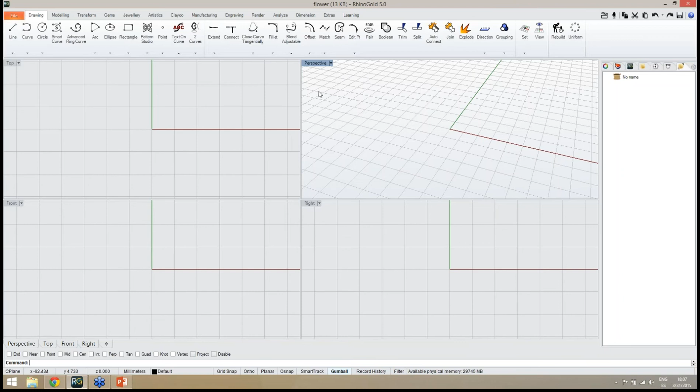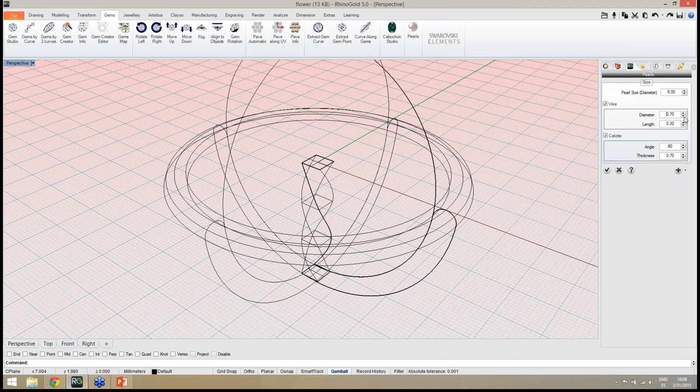So let's open the RhinoGold interface. As you can see, the first step I'm going to use, under the Gems tab, is the Pearl Studio. I click on the Pearl Studio icon, and I just need to define my pearl. In this side panel, I need to define the diameter - in this case, I'm going to use 8 millimeters diameter. Then we can define the wire and the calotte. I would change to wireframe display mode just to show you what is the wire - this is where we will place the pearl. So I can define the diameter, in this case 0.8 millimeters is good, and of course the length.

As you can see, I can define it bigger or smaller. In this case, I will define it in the middle of the calotte, but as you know, we can change it. In this case, it's just to make the Boolean operation easiest.

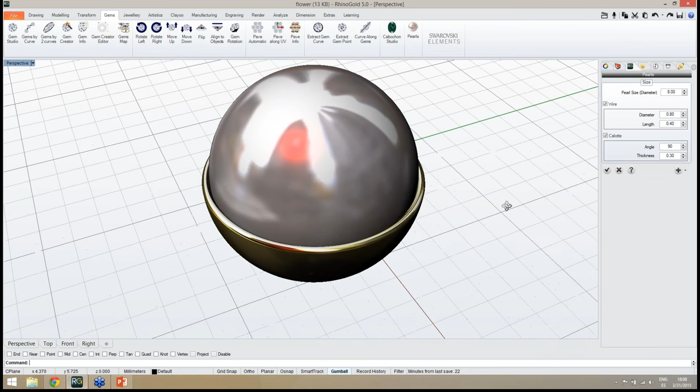After this, I'm going back to rendered display mode, and I just need to define the angle here. I will define 90 degrees, and of course the thickness. As you can see, we can change the thickness as well. In this case, I'm going to use 0.3 millimeters thickness, okay.

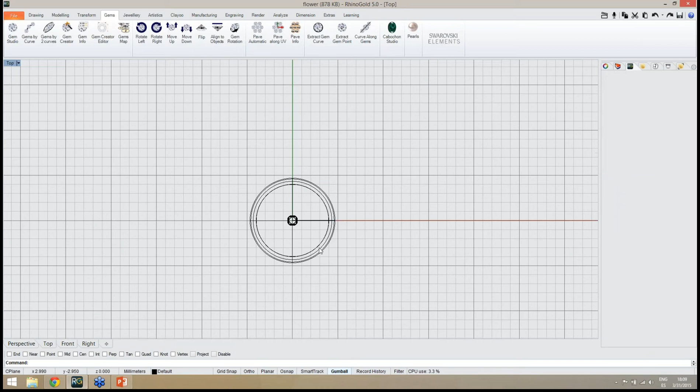Now we have the pearl added to the document. The next step is to define the flower. I'm going to the top view, and here I can change the display mode again.

In the top view, I'm going to define a curve. Let's go to the drawing tab, and here I'm going to use the Smart Curve tool. When I click on Smart Curve tool, I just need to define my points to define the curve. As you can see in the command line, we have several options.

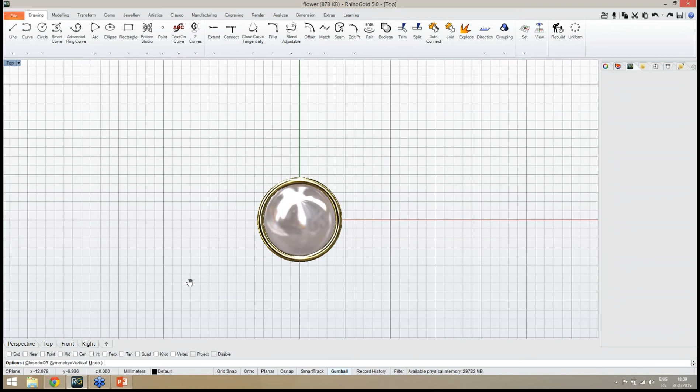So I'm going to start by activating the vertical symmetry. I just click on symmetry, then vertical, and as you can see, now it's activated. So now I just need to define the points. First point, I define both sides of the curve, and now easily I can define my curve.

In this case, I will leave more or less 3 centimeters for the diameter of the flower, so 1.5 centimeters is good. After the second point, I just press enter, and now I have my curve here in the top view.

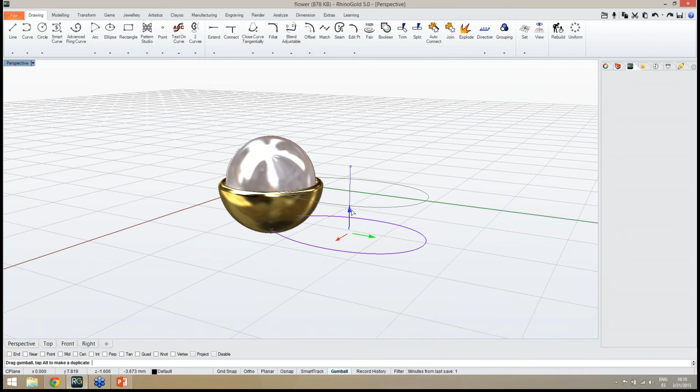Let's go back to the perspective view, and now I can organize my curve to be easier to define. I'm going to move down my curve more or less at the same height as the base of the pearl, so I can do it in the right view or front view, maybe it's easier. I believe this is a good position.

Back to the perspective view, what I can do to adjust my curve is to make these points inside of the pearl. I'm going to select the curve with a left click, and now I will use the edit point tool.

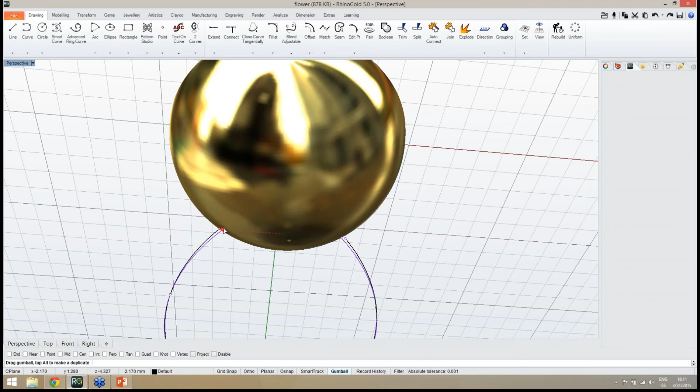After selecting the curve, I define the edit point tool, and I can select this point and this point to adjust the curve a little bit. With the gumball activated, I just drag this point, scaling in one direction a little bit inside. Very easy to define it.

Just select both points, scale in this direction, and both are inside. Now I don't want to create a flat object, so what I'm going to do is take one part of the curve, this side, this point. Let me select this point, and I'm going to move it up 1 millimeter.

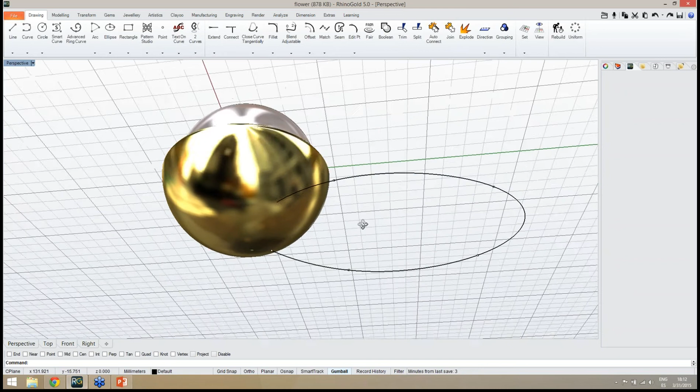So double click on the gumball arrow, define 1 millimeter, enter, and I'm going to do exactly the same. Now the curve is not flat anymore. I'm going to do the same with this point: double click on the arrow in the direction I want to move, and define 0.5 millimeters. Now I have the curve exactly as I want, one side above the other, and I can press escape on the keyboard to exit the point edit mode.

Now I can apply a profile along this curve. To do it, let's go to the jewelry tab, and here I'm going to use the dynamic profile tool. The idea is to select the dynamic profile tool, then the first step is to select the curves where I want to apply the profile.

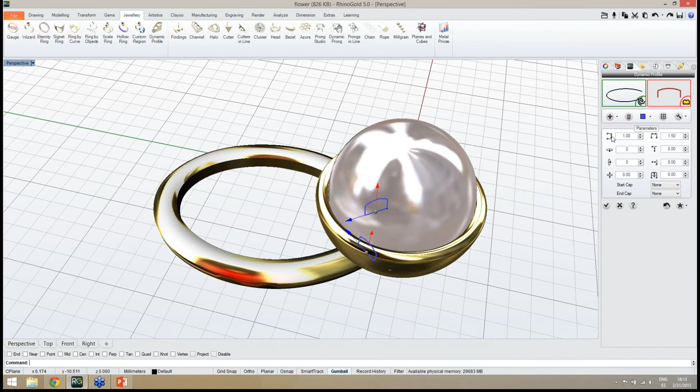I click on the curve and press enter to add it to the selection. Now I just need to define the profiles. In this case I have two profiles, and I will define the measures I want to use: width, 1.5 millimeters, and height, 1.3 millimeters.

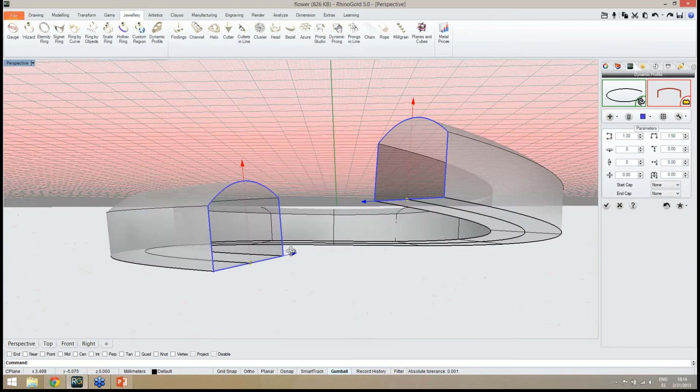Okay, looks good. Remember, by default it's an open solid. Let me hide the pearl to see it better. This is an open poly surface, so I need to define the cap type. In this case, I'm going to use the flat cap type, so I define both start and end cap flat.

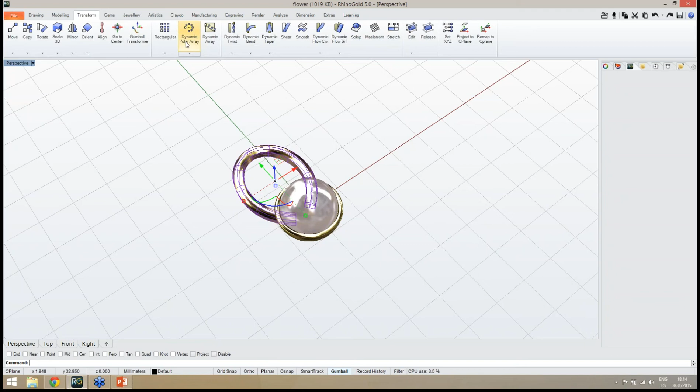After this I just need to check to add the profile to the document. Now I can show the pearl again. Let me go back to render display mode, and now I'm going to duplicate this element. To do it, under the transform tab, I'm going to use the dynamic polar array tool. So I select my object, then click on dynamic polar array, and easily I can have the circular duplication.

So I'm going to define the number of copies. In this case, I'm going to use 8 copies, as you can see. 8 copies, okay, looks good. After this, I just need to check in here to add the changes.

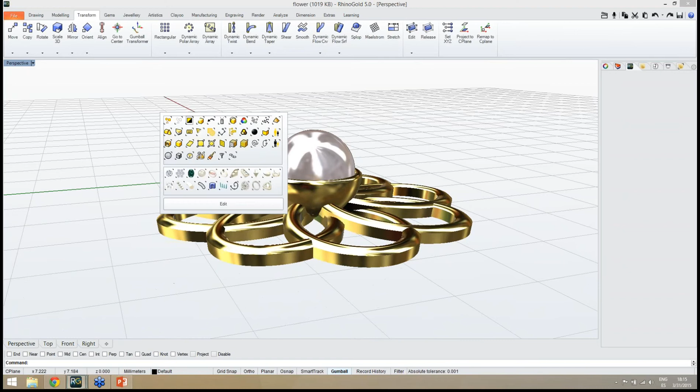As you can see, I have my first line, and I want to create another one above this one. So what I'm going to do is middle mouse button, select the curve. As you can see, the curve is selected, and back to the top view.

Let me change display mode to make it easier to understand. I have the curve selected, and in the top view I'm going to use the scale 2D tool, scaling in 2 directions. I click on this tool, and in the command line I define copy yes, since I want to create a copy from this original curve.

So the start point, I'm going to use the 0, this one, I click here. Remember to activate grid snap to make sure you're using the 0, then I select the point to copy from and the point to copy to. In this case, I'll copy to here, click again, and enter.

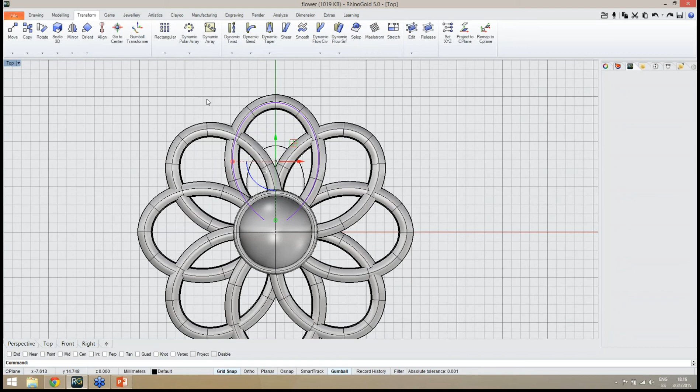So now I have another curve, and with this curve I'm going to move up once again, as you can see, and once again I'm going to make the dynamic profile. So under the jewelry tab, dynamic profile tool, and once again let's define the measures for this profile.

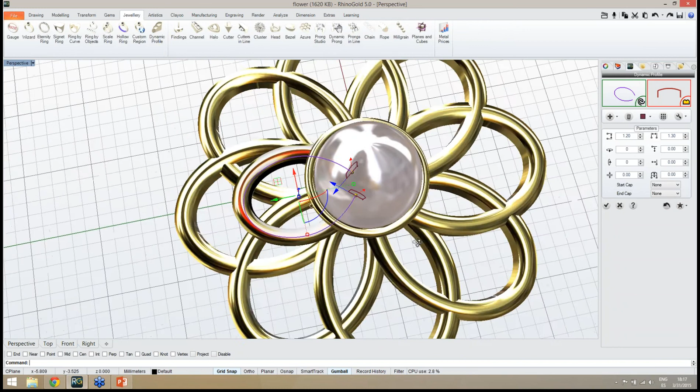What I'm going to use now is height 1.2, and width I'm going to define also 1.3. Okay, looks good. Check here to add the changes, and as you know, it must be a closed solid to make the Boolean operations.

I didn't close it, so just to make sure it's closed, I select the dynamic profile, middle mouse button, and edit. In edit, I can define the cap type as flat for both profiles. Checking here, and now I have my dynamic profile closed. So this is the idea.

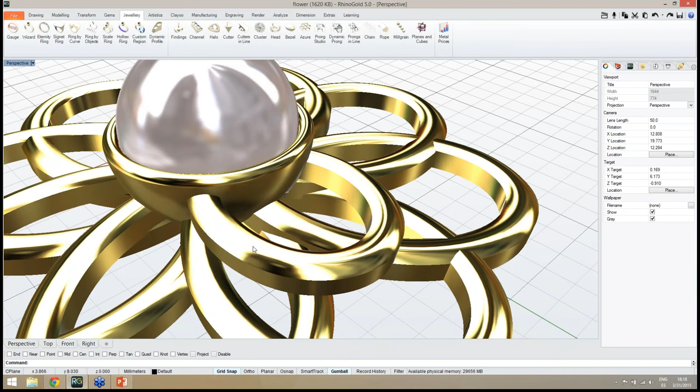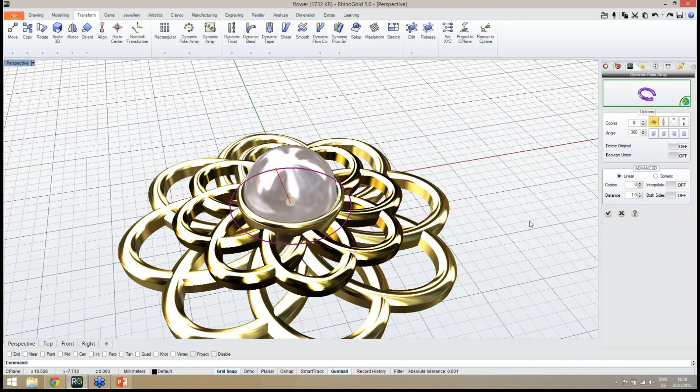And the next step, let's go back to the transform tab, and I'm going to select this profile, and once again use the dynamic polar array tool, defining the same amount of copies. In this case, once again 8 copies in the same direction, and checking here to add the changes to the document.

Okay, looks good. I just want to rotate a little bit. We'll see we need to make some operations, because at this moment we have these profiles inside of the pearl. So to start, what I'm going to do is make a Boolean operation to unite all these elements. So modeling tab, Boolean tool, I define Boolean Union, and select all these profiles.

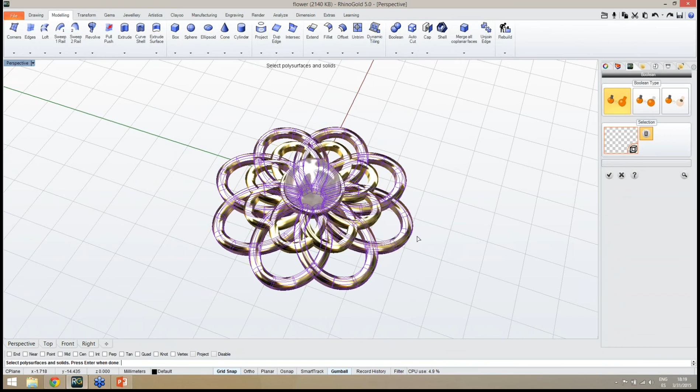So the first, the bottom ones, enter and preview. Okay, as you can see, I've done the Boolean successfully. And now the same again. So Boolean operation, and I select the others. Okay, enter and preview.

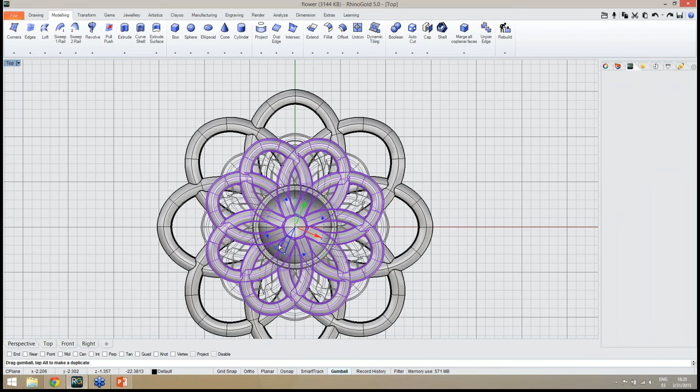Done again. So now what I'm going to do is rotate this profile a little bit. I select all these profiles, and in the top view I want to rotate. With the gumball I can disable the grid snap and rotate a little bit. The idea is to make it exactly in the middle of the previous one.

Okay, so now I'm going to define the Boolean operation. Let me hide the pearl in order to understand what I need to remove.

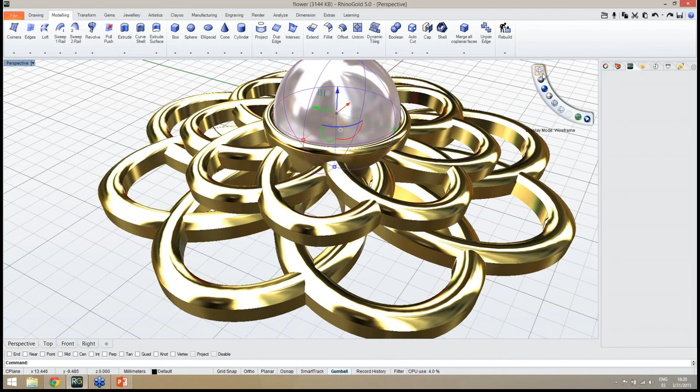As you can see now, I have all the profiles in here, so I need to remove from here. So the best way to do it is by defining another cutting object.

I will define a sphere. To make sure I'm using the center, I can go to the top view, enable grid snap, and I'm sure I'm using the 0. Now the idea is just to make it bigger than the pearl and smaller than the calotte. So somewhere around here I have my cutting object.

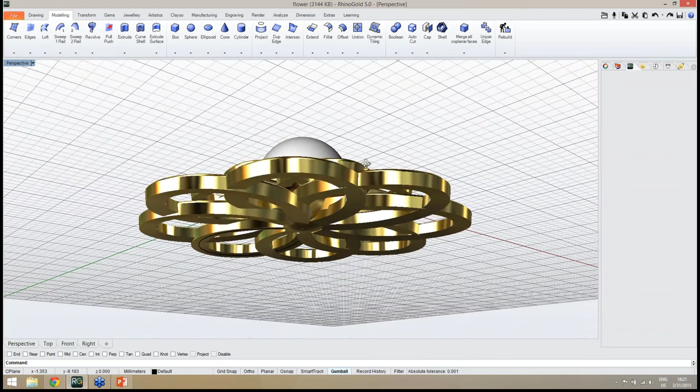Now I need to make my Boolean operation to remove it. Using the dynamic Boolean tool, I define the Boolean difference. I select objects to keep first, enter, then objects to remove, the sphere. Enter again and preview the results. As you can see now, we have cut all these profiles.

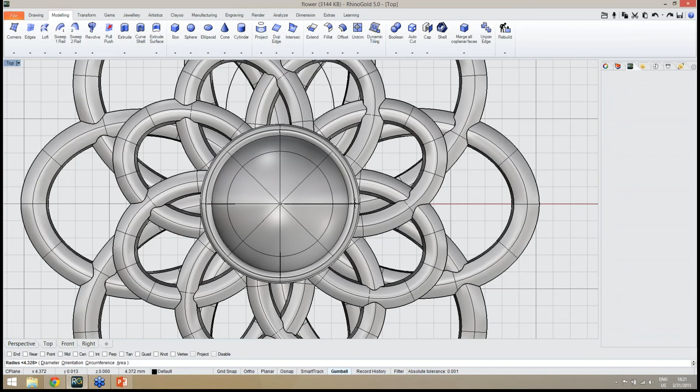The next step is to add another sphere, another cutting object. From the center, switching to the top view makes it easier. Using grid snap from the center, I click the second point in the same place, so we have another cutting object. Once again, Boolean, select dynamic Boolean and Boolean difference option, select the objects to keep and then the objects to remove. Preview and done.

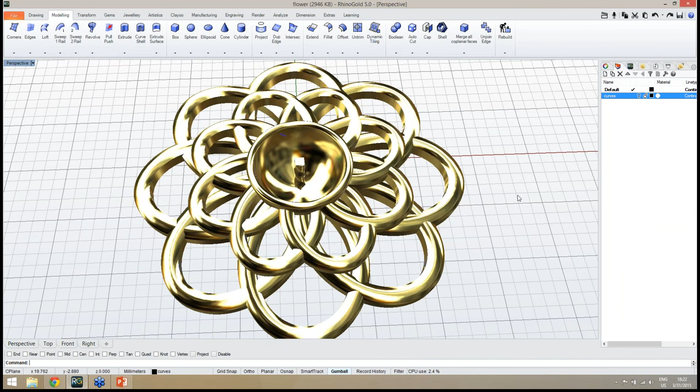Let me hide the Pearl. As you can see now I have only curves. I can select these curves and move them to a new layer, call it curves, change object layer, and then hide that layer. So this is the idea. I can show the Pearl again.

I also remember we can change any material. As you can see, we have several materials.

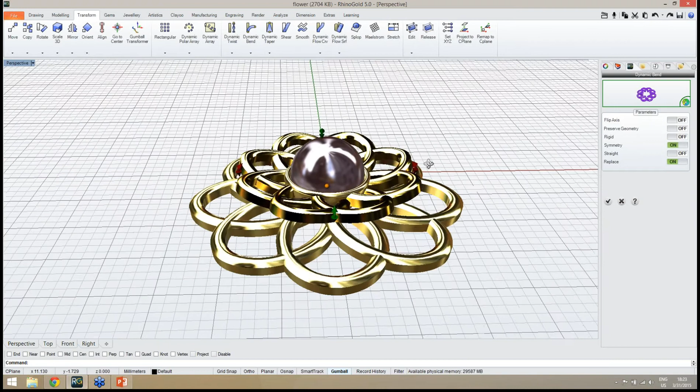Now I'm going to bend my object. As you can see, this is almost a flat object. I'll select the first one and use, under the transform tab, the dynamic bend tool, and just define the inclination. Remember, if we want symmetry on both axes, we need to press Shift. Easily we define the direction, and as you can see, I can bend my object on both axes when pressing Shift. I can bend a little bit more. Looks good, and check here to add the changes.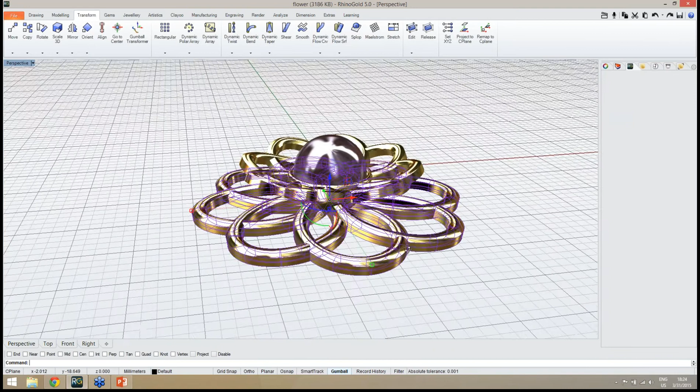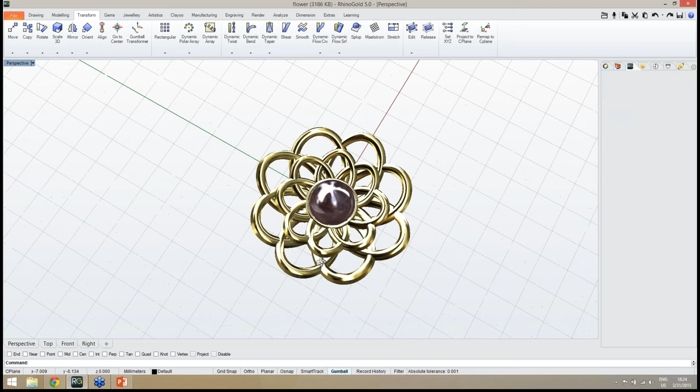Now I'm going to do exactly the same to the bottom object. The idea is dynamic bend, remembering to press Shift for symmetry on both sides, and define the bend angle easily just by dragging this arrow. As you can see, easily we define the angle we want. In the end, remember to check here to add the changes to the document, and as you can see, easily we have the model defined.

Now I can adjust the position a little bit. This one I will move down a little bit, we still have some space, just a little bit more down. And this one I can do the same, a little bit more. Looks good. Actually we can adjust as we need.

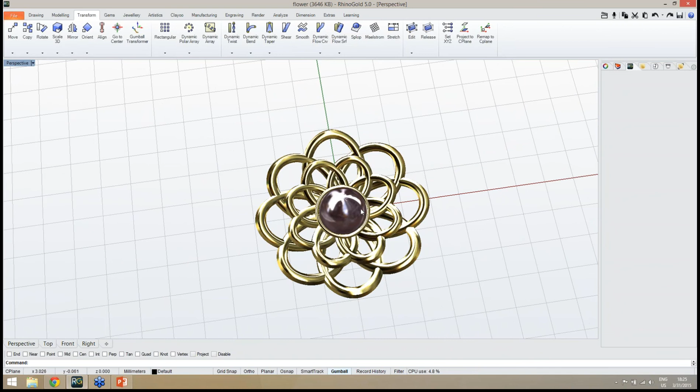Now the next step, I'm going to apply some gems. To do it, I'm going to use the top view. Let's go back to the top view, and with the Gem Studio tool under the Gems tab, I will define a 2.5 millimeter gem. With the option to insert, I will insert by defining a point, so I just need to define a point to apply my gem.

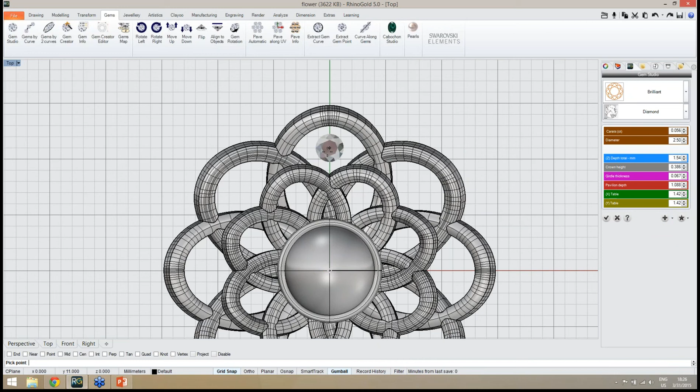I'm going to use the grid as reference, so I'll use this position, maybe a little bit up, and another one here. For the other one I'll use a 2 millimeter gem, and once again with the pick point option, I'm going to define the position here. Looks perfect.

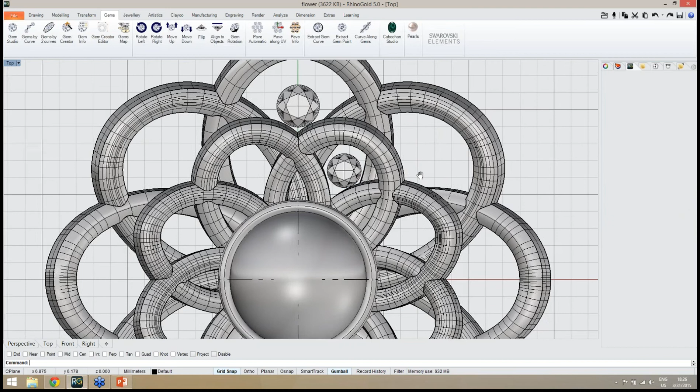Now enter again, check here to add the changes to the document, and I just need to define the position correctly. Probably I will move it up a little bit, so select and use the gumball to move up, remove the grid snap, and also rotate using the gumball so I can easily adjust the position to follow more or less the shape of my object.

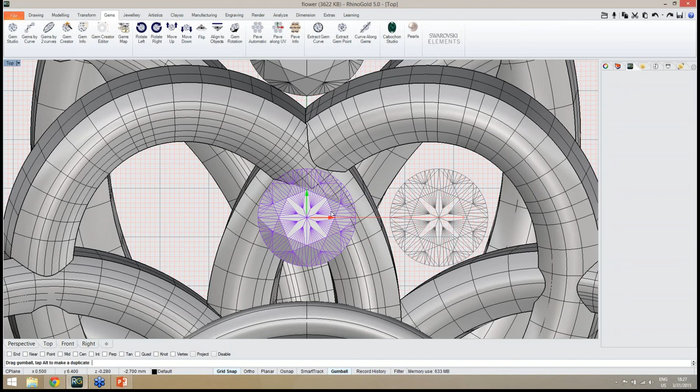I will do the same here. To make this one, it's probably easier to make the rotation using the middle position, so I just place it in the middle to make sure I rotate as I need. Let's go back to the perspective view. I can rotate easily like this. Looks good, and now I have the rotation I want.

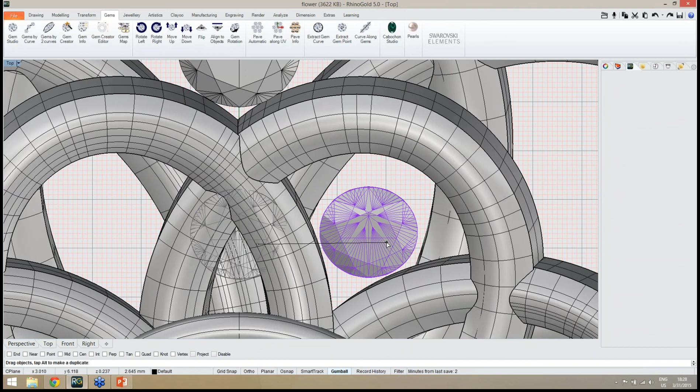Back to the top view, I can place it where I want to use it. Here looks perfect. Okay, and we have our gems.

Now I need to create the bezels. To do it, I'm going to use the Bezel Studio tool under the Jewellery tab. The first step is to click on the gem I want to apply the bezel to, select the first gem, press enter, and now I can define the bezel parameters easily. Make sure the bezel is touching the other part in order to make one single object.

Now I will adjust these parameters, a little bit less here. Remember, if you press Shift you use the ortho.

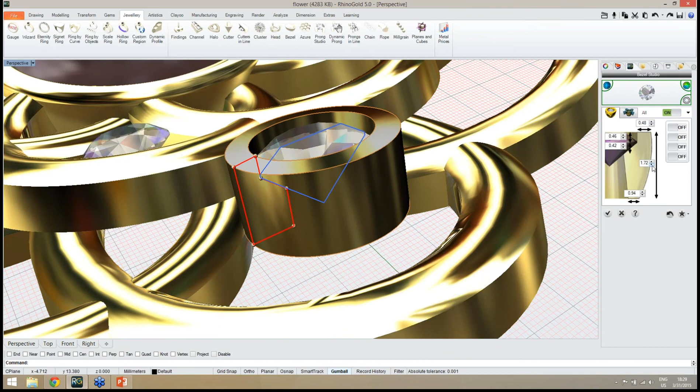And we can adjust the bezel parameters by dragging these points. Of course we have the measures in the side panel. I can use less in here. I don't need so much, probably 1.6 it's enough. And also we can enable more control points just to add some different shape. I can adjust this a little bit inside. Also this I can move up a little bit, and this one I will adjust as well. So I can create a round shape.

Okay, looks good. Can adjust a little bit more if needed, but I think it's more than enough. And I check in here to add the changes.

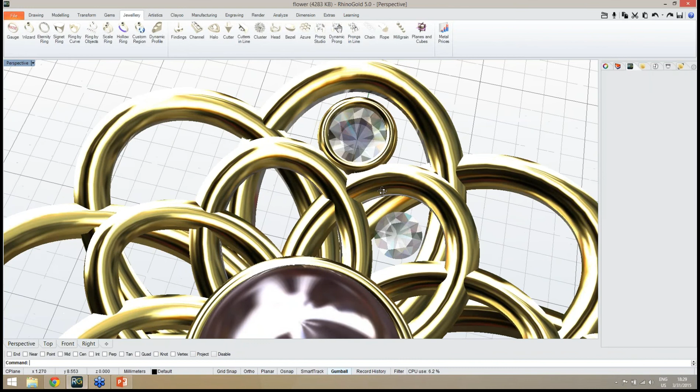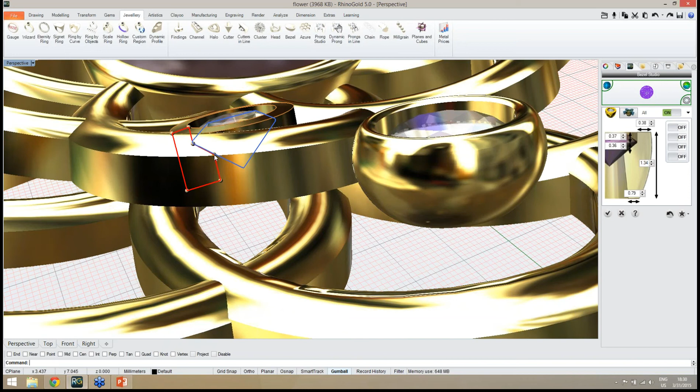So first bezel created successfully, and now the second one, I'm going to select the gem, and once again Bezel Studio tool, and I'm going to adjust the parameters. Once again, I don't need so much height. I can reduce a little bit, maybe 1.3 it's enough.

I adjust the 8, in this case the bottom thickness, and I can once again add more 2 parameters. Even the bottom one we can add easily. So I adjust the position, I can adjust the angle, also this one, and also this one. So easily I can adjust the shape. Remember to make sure the bezel is touching the other part to make the Boolean Union then.

Looks good. I can check in here to add the bezel to the document.

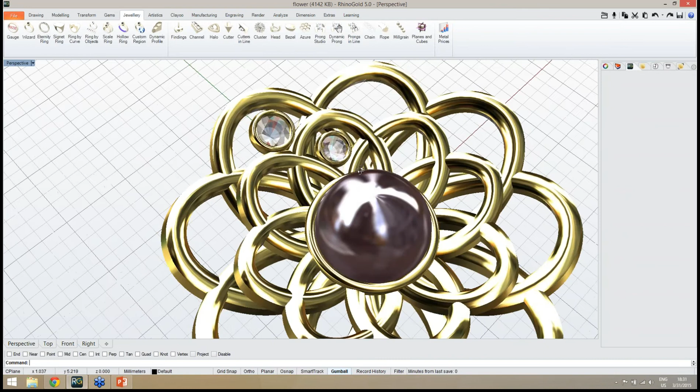So the next step, I will make the copies from the gems and the bezels to go around my object. So I select the bezel and the gems both, and I'm going back to the transform tab, and I'm going to use the dynamic polar array to create the copies. Of course, remember to use the same number of copies we used before, in this case 8, and you will see the gems will be exactly in the position we want.

So I can check in here to add the changes to the document. Okay, looks good.

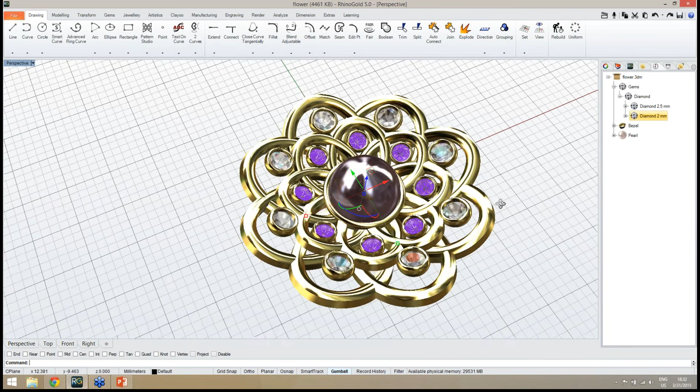We can now group some of the gems just to be easier to define materials and so on. So I can select, probably, let me use this option. I select the diamonds with 2.5 in the browser, and under the drawing tab I can group them, and the same with the diamonds with 2 millimeters diameter, and group easily. So as you can see, we have defined it all successfully.

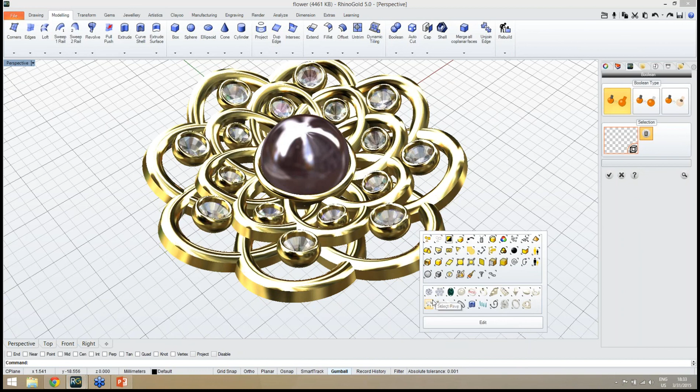Now let me make the Boolean Union. So I just need to go to the modeling tab, Boolean, and in this case I select this object and all the bezels. So probably it's easier if let me escape. If I press middle mouse button and select all the bezels in the document, and now this object with shift, so I just go to the selection box and all the objects are selected.

So we just need to click on preview, and as you can see, easily we make the Boolean operation to make this part as a single object. Checking here, and we have successfully created this one.

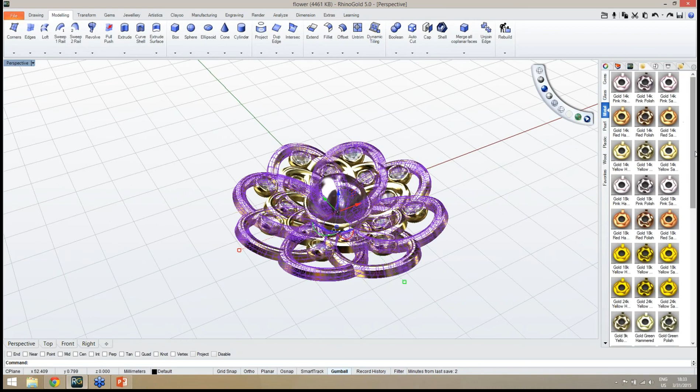In the bottom one, we can apply other material. We can, after printing and casting, weld this one at the bottom. So I'm going to use for this, go to the RhinoGold materials, and I'm going to define white gold on this one. Let me look for white gold 18 carats. So easily I apply other material.

And now the flower it's done. The flower it's ready, and let's take a look at two different examples. So I can use this model. I have created all the measures exactly as I want. So I can define a pendant easily, and just by defining the bail, the pendant bail. But also I will create a shank, and in the bottom I will define a ring. So I will use this model for two different pieces. So let's start with the pendant.

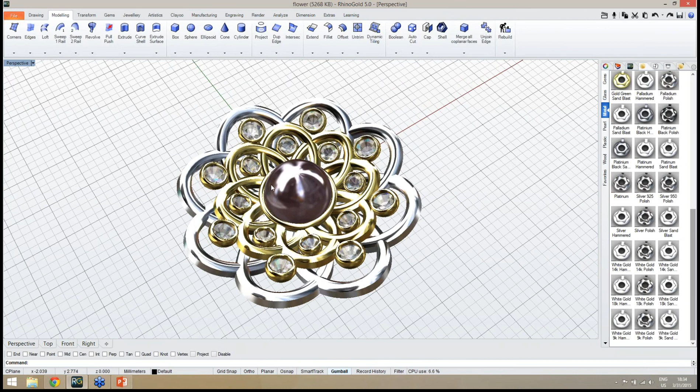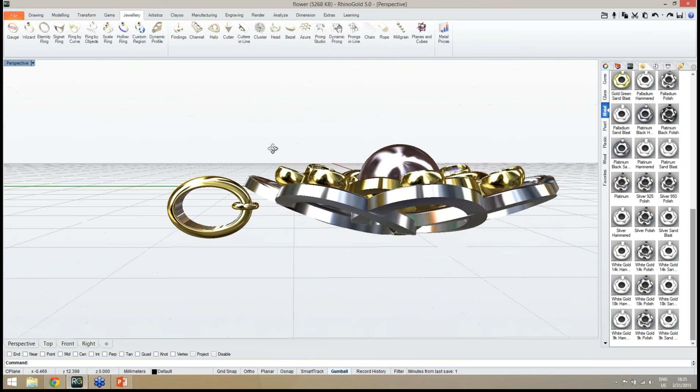So let me go to the jewelry tab, findings tool, and in here I can select. I have several options. I'm going to choose the bail number 2. So double click, and as you can see, the bail was added to the document. I just need to adjust the position. So select, and using the gumball I can easily adjust the position.

So now I'm going to also change this to white gold 18 carats. So the pendant is defined.

Now I'm going to define a ring. First I'm going to select all this and create a copy, except the bail.

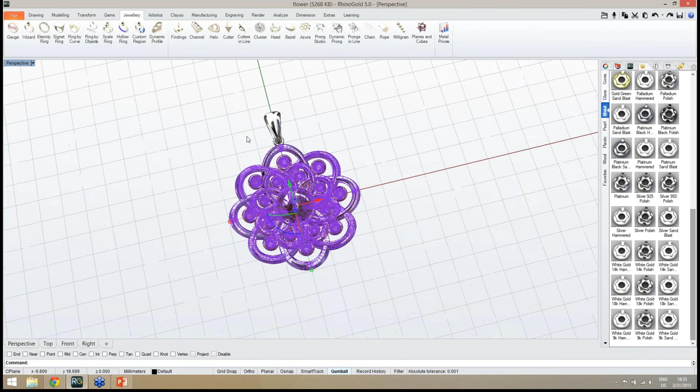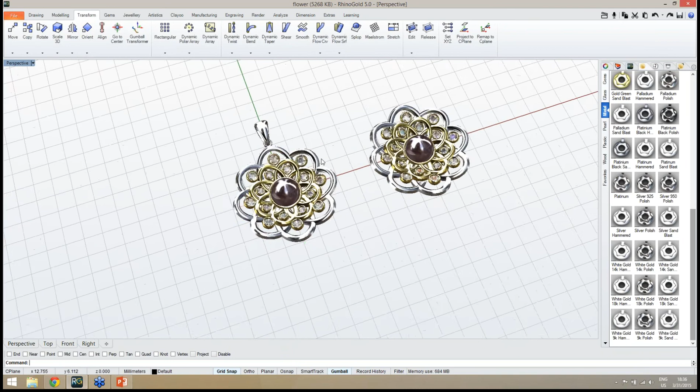Using the transform tab and the copy tool, I define the point to copy from, pick any point, and the point to copy to. I create my copy, enter, and now I can move this to the same place. I'm sure it's in the same place because I have grid snap enabled. Now I'm going to define my ring shank.

Jewellery tab, and I'm going to use the ring wizard tool. Let me open the ring wizard tool. As you can see, we can easily define the ring region, and of course the ring size we want to use. In this case I can use ring size 20 from European measures.

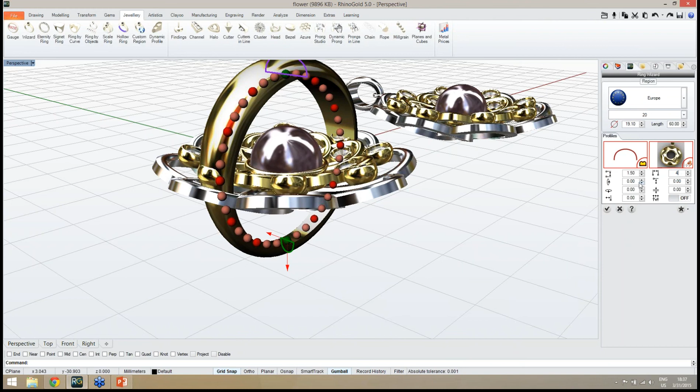Let me use in the bottom, I will keep this profile, but use 4 millimeters in the bottom. And in the top, remember, double click outside to deselect the profile, and we can select this one and now adjust. In the top, I will use just 2.5 millimeters width and 2 millimeters.

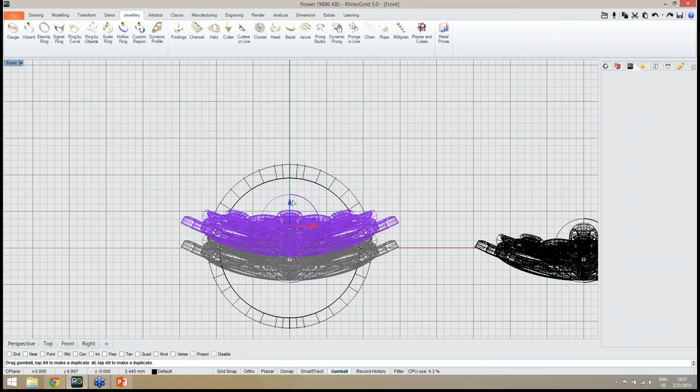Okay, we define the ring shank, as you can see. So I add the ring to the document, and easily I can move this up. In the front view we can check exactly the position. So easily, as you can see, I move this up, and I create one ring and one pendant.

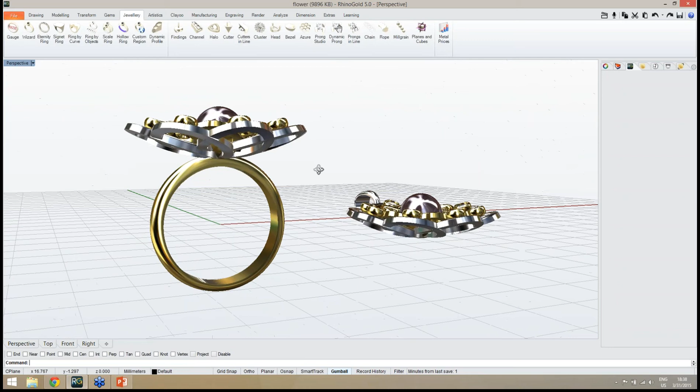So this is the idea. As you can see now, the model is defined. Let me create the render. Probably I will also talk about some tricks to make a good render.

It's good if we fillet the edges. For instance, in the shank, as you can see, I have a sharp edge. So I can easily, under the modeling tab, fillet submenu, and variable fillet tool, define the radius. I will define 0.3 millimeters, enter, and select the edge I want to fillet.

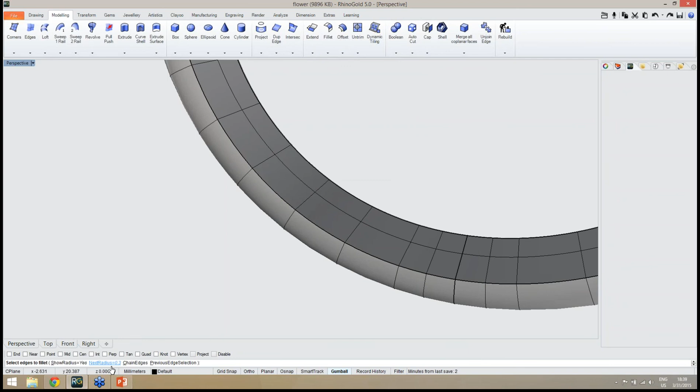Press enter, select the edge, and as you can see now I create a round corner, so the same on the other side. Fillet submenu, variable fillet tool. It will remember the last radius used, so just select the edge, press enter, and it will apply the fillet to the shank. So now probably it's also a good idea to make the necklace here.

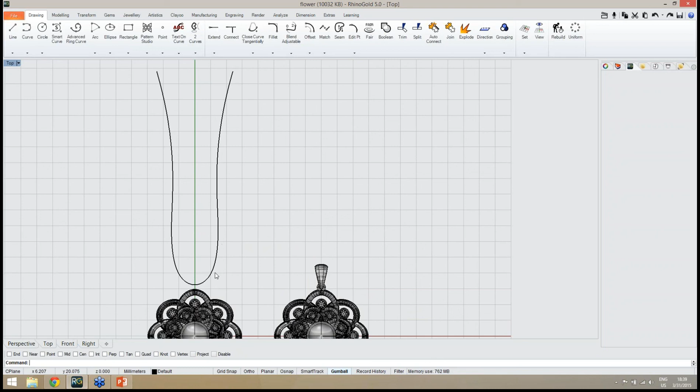Let me go to the top view, and in here I'm going to use the drawing tab. I can use the smart curve tool to define a curve. For symmetry, I will use vertical again. Remember, it will use the axis to make the symmetry, so probably I will use this axis, and then it's easier to move the curve exactly where we need.

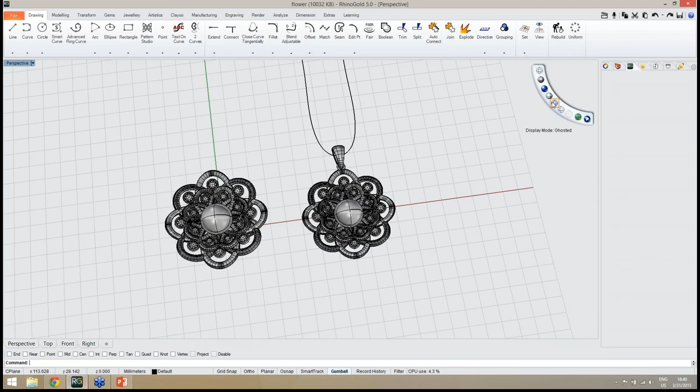And once again here, and finally in the right view, just to make sure it's in the middle, we can move up a little bit. So from here, let me go back to rendered display mode, and I will apply a rope.

Jewellery tab, rope tool, I click on the curve I want to apply the rope to, press enter, and now as you can see I have the rope. I just need to define the parameters. First I'm going to define the diameter for each thread, 1 millimeter, and then we have the number of threads and the number of turns. Let me use 15 turns. Let's take a look - the results look perfect, and checking here to add the changes.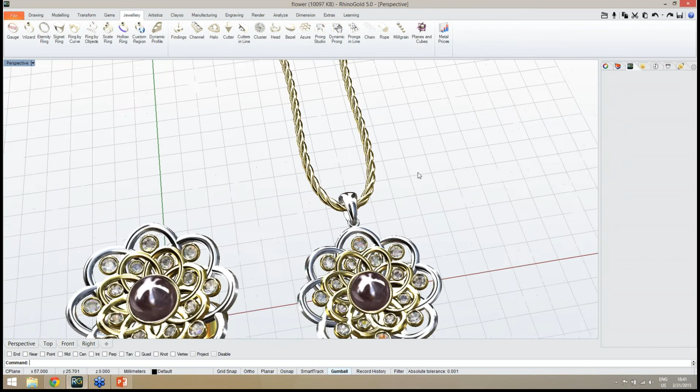Okay, looks very good. Now, before applying the materials for rendering and starting the render, I'm going to adjust the position. It's always good to define the objects' position to have a good render. So let me go to the right view. I will rotate in this direction. Remember, if you press shift you activate the ortho, and here I'm going to do exactly the same.

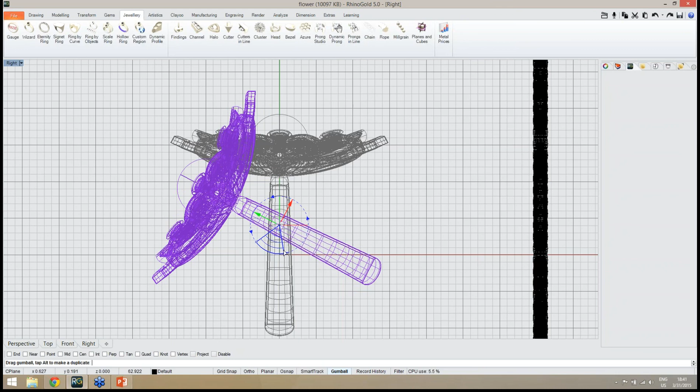So I select the ring and I rotate, so easily I can define my position. If we need, we can zoom in to have more control. So zoom in, rotate, just using the grid as reference like this.

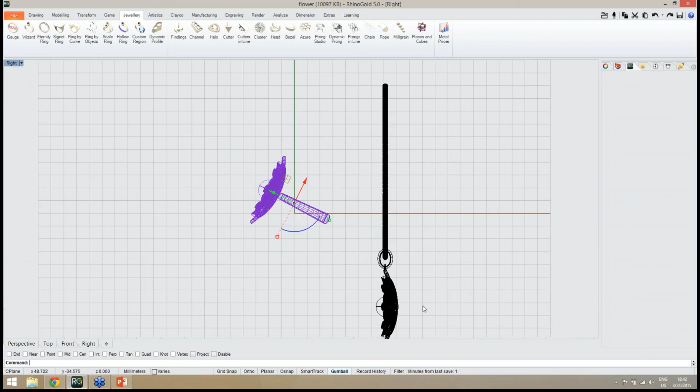And I'm going to move this one as well. So I select the pendant, move up, just to make sure it's using the same line, so it's perfect. And back to the perspective, I can adjust the position. So I can move this here, rotate a little bit.

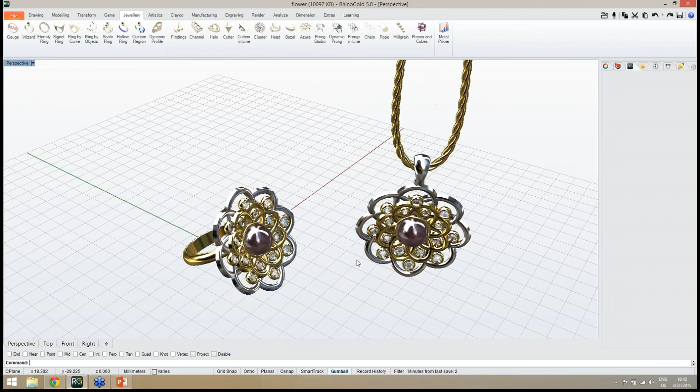Let me zoom in. I'm going to move a little bit more. Maybe in here it's good. Okay, now I zoom in a little bit more, and it looks good to start making the render.

Now I need to open the Render Studio. So Render tab and Render Studio icon. As you can see now, we have a different color in the background. It means that the environment is applied by default. So now I just need to select my materials I want to use.

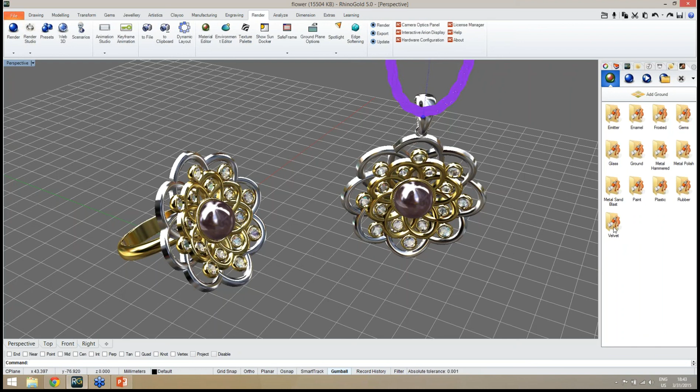Let's start with the rope. I select the rope, I go to velvet, and I can use, for instance, the black one.

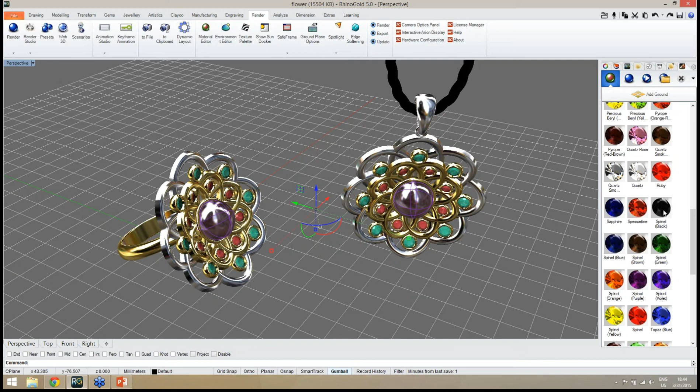Then I want to use, so this group of gems and this group of gems, I'm going to use material. I'm going to the gems folder, and I'm going to use the emerald material. Double click, we apply the emeralds, and in here I select the first group of gems and use ruby. So ruby, emerald, and in the central one I'm going to use the spinel black. Double click, we apply the material, and now I can select the white gold, this one.

Let's move up and go to the metal polish folder. I'm going to use the white gold material, and to select all the yellow gold I can select like this one by one, but there's also another option I didn't talk about before.

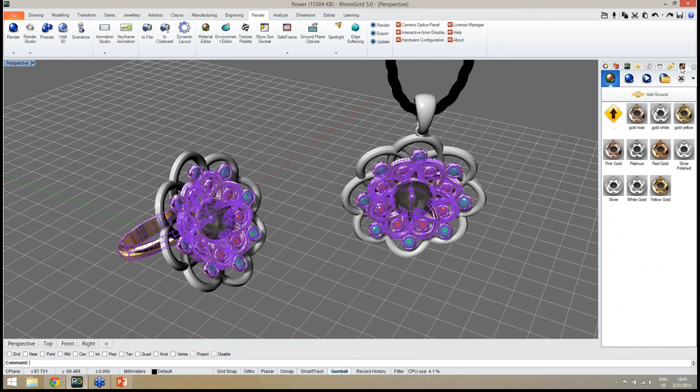It's the RhinoGold material selector. We can just double click in here to select the material we are using, or we can right click and say select. So now I'm selecting all the yellow gold, and let's use the yellow gold from the materials from Arion Render.

Finally I'm going to add a ground. As you can see, it's a surface at the bottom of my elements, and in the ground folder I'm going to use the lead. I just apply by double click or drag and drop. Remember, we can drag and drop, or we can double click with the object selected.

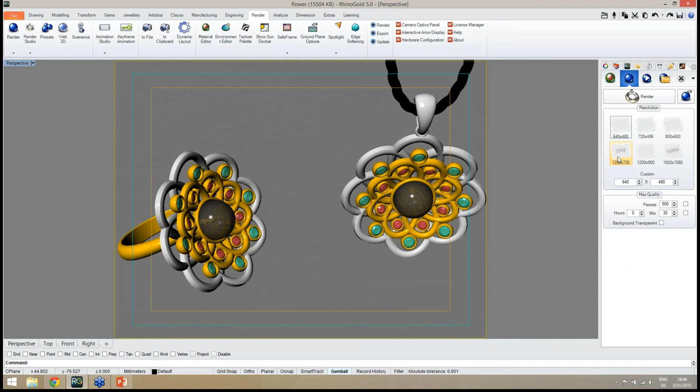Easily now I'm going to the render tab, and I can define the resolution. As you can see, I have now this safe frame. After defining the resolution, it can change according to the resolution selected. In this case, I'm going to define HD resolution, and I can adjust the position. Looks good, let's start render.

Click on render to start rendering, and now Arion is calculating the render. As you can see, it starts with a lot of noise. The image has much noise, but now with the number of passes, it will start cleaning the image and making the render with good quality. So let's wait a little bit to see the results.

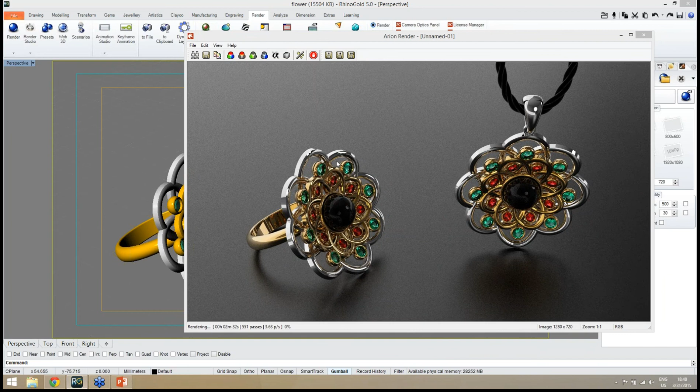We have received some questions, not many because we told you the model was easy, but there was a good question from Ewell, though I'm not sure if I'm pronouncing the name correctly. He's asking if it's possible to show how to edit the shank with the dynamic taper tool, one of the new features of RhinoGold 5. Oh, good question.

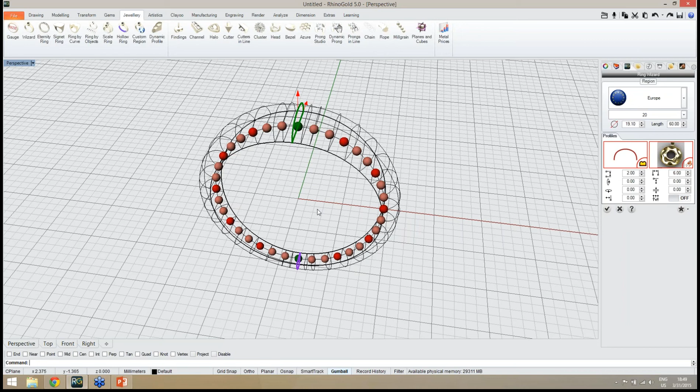Let me just open a sample file to show you. Actually, yes, of course we can use the dynamic taper tool, as you can see in the transform tab. Probably if we're using the ring wizard to create the shank, we won't need it, because the ring wizard tool allows us to do it directly with this tool. As you can see easily, I can define a different angle at the top and at the bottom.

But for other cases where we create the shank without using the ring wizard tool, maybe it's a good point to show a little bit how to use it to taper the shank. So let's use this one as a sample.

So let's go to the Transform tab. When I use, in this case, the Dynamic Taper tool, I need to select the object to taper. So in this case, the shank.

As you can see, RhinoGold will show me several axes, with a point at the end of each axis. What I need to define here is the point I want to taper. So let's imagine I want to taper at the bottom of the shank. I will choose this point, this axis, especially in the bottom direction.

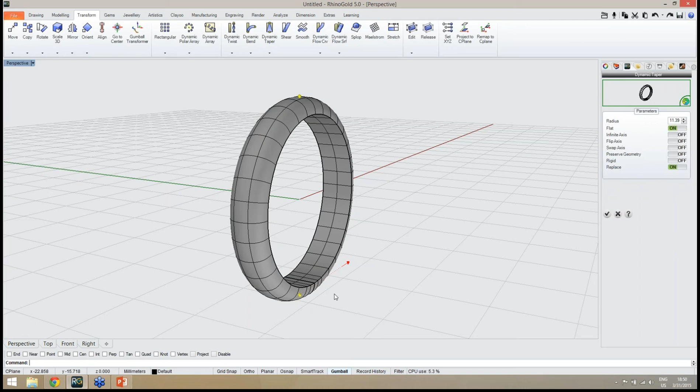I just click here, and as you can see, I have one arrow in this direction and two points. These two points allow me to define where the start and end of the taper are.

But of course, I need to define the correct direction for the arrow. I don't want to taper in this direction, I want to taper in the other. So I just need to select this option, swap axis.

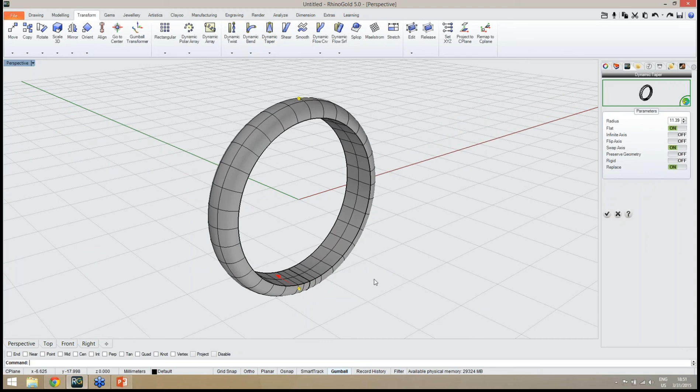And as you can see, I can easily define the angle, in this case the taper distance I want to use. So easily I can make it bigger or smaller. So this is the idea.

Of course, as I told before, if I've used the Ring Wizard, we can do it with the Ring Wizard tool. But in other cases, it can be really useful to use this option.

So just to show how it works. Thank you, Pedro. Thank you. I hope it got answered. Let me know, Ewell, if there is any question in the chat.

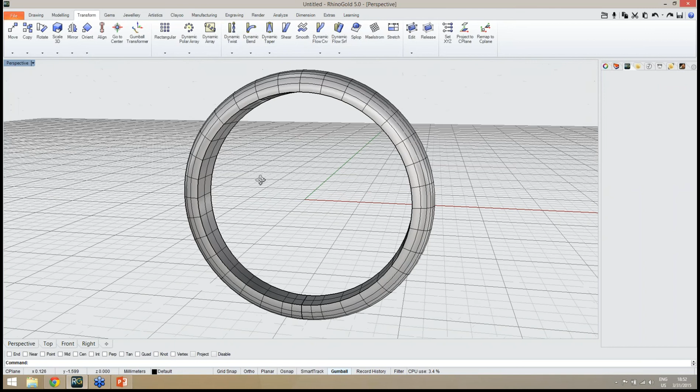So within the next 2-3 minutes, keep asking questions. Pedro, yes? Yes, well, I just saved the render.

As you can see, on the ground, probably if I leave it a little bit more time, we'll have much better results. We still have some noise in the image, but easily we can create a model, a render, just to show the workflow, how it can be done.

It's looking good, Pedro, it's looking good. Don't worry. For the first time in our life, we did a webinar on time. That's true, we were not delayed.